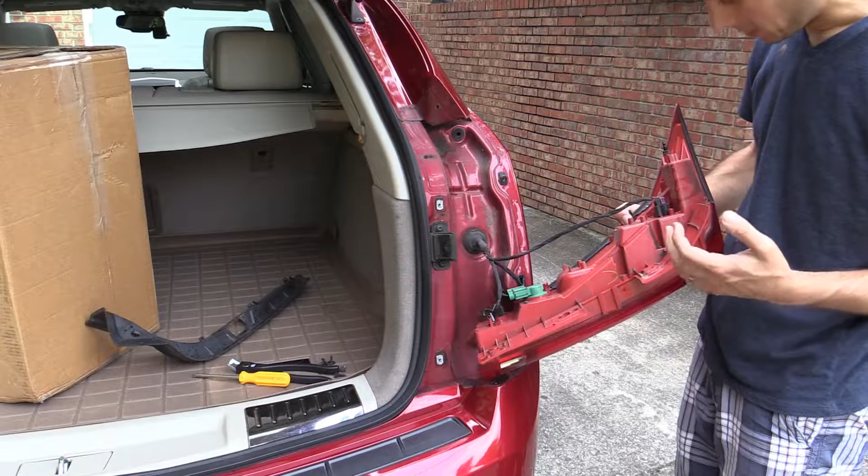So we've got, looks like 3 connections back here. The top one, I believe, is going to be for the brake lights. The brake lights are all LEDs, not really replaceable. Then you've got this big connection here, which is going to be your turn signal, a standard incandescent bulb, as well as one bulb over here for your backup lights, which is also a standard incandescent bulb. Fun fact, it looks like there's 2 bulbs down here in the bottom, but this one over here is fake, so there's just the one.

So let's go ahead and disconnect these. There's a clip there. Oh, that's not good. And that's it. That's pretty much all that's required to remove the tail light.

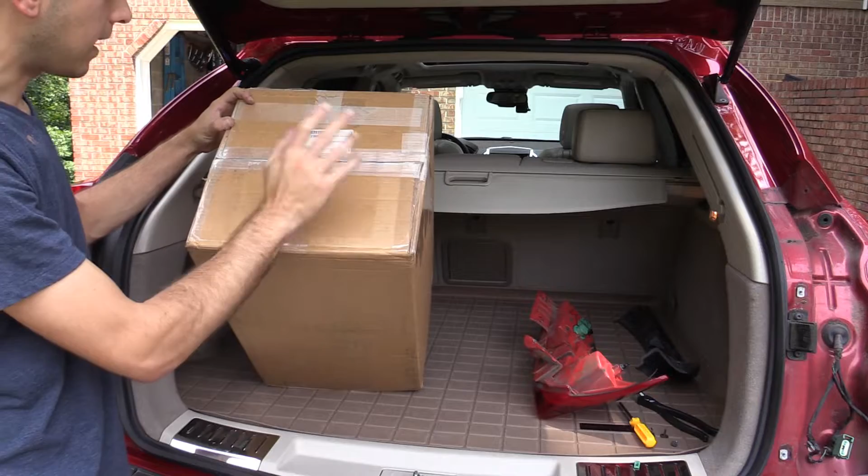So there's what the assembly looks like. Let's unbox one of the replacements. This is the actual GM box that they ship in, and there's the part number there. I'll leave a link in the description below. We've got some paperwork here. There's apparently a little bit of modification that needs to happen to the factory harness to make it fit these lights, so we'll look into that in a moment.

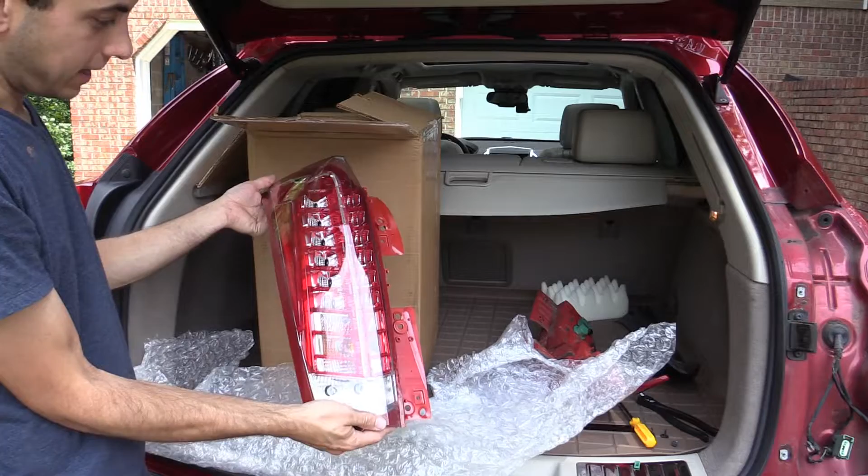These are brand new. And that's what the accessory tail lamps look like. It's really hard to photograph how good these look. These look great in person, in my opinion. I realize it might not be what some people are into, but I really like the look.

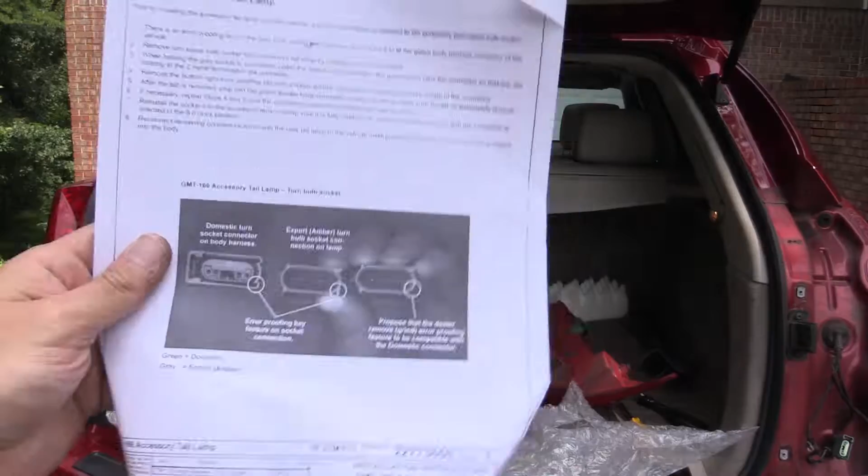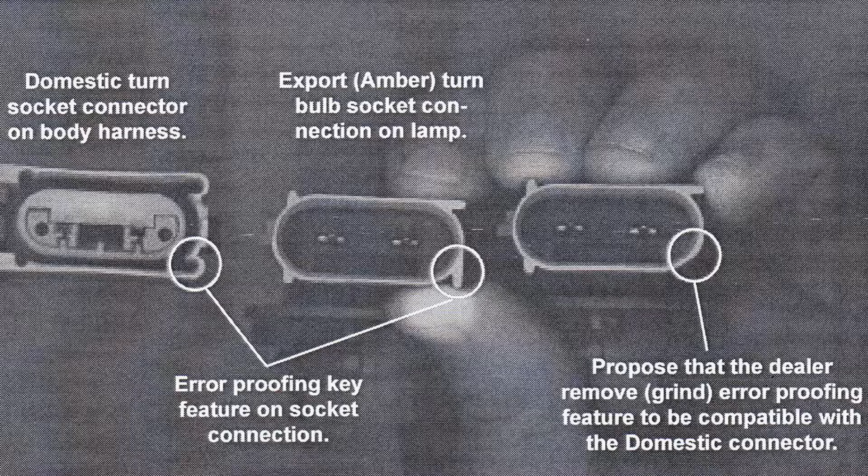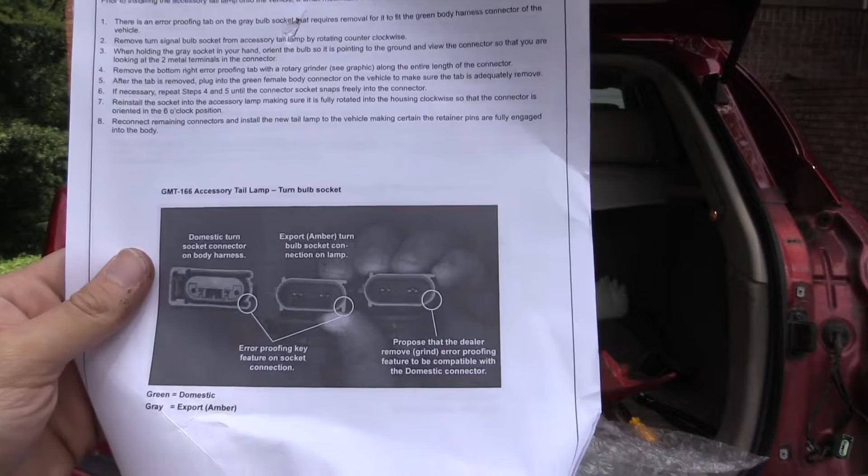But in any case, the only thing that confuses me here is why go to all the trouble to modify this connector? Why not just swap the harness or swap the bulb socket from one to the other? So let's see what's going on here.

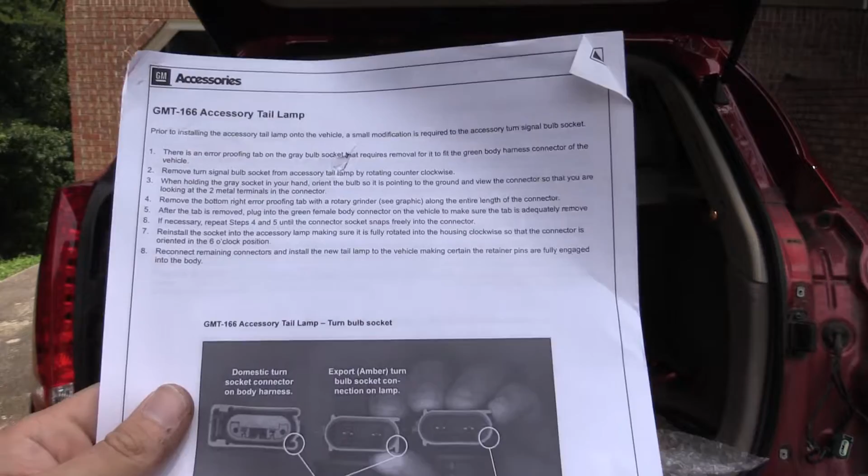So here's the original bulb socket. This just twists out like this. So we'll compare this to the other one and see if we can't just pop this in the other light.

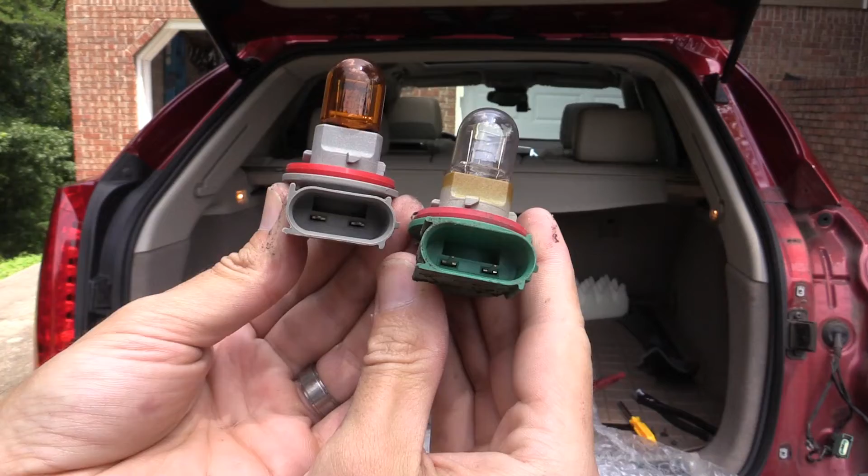Alright, so you can see the differences now. The green one on the right is the one that came with the car, and the gray one on the left is for the accessory tail lamp. And you can see how the plug is molded a little bit different on that one corner.

So what they're proposing is that you literally shave off the little nub here that's different. I just don't understand why we couldn't just swap the bulbs and swap the actual bulb socket here and save ourselves a lot of grief.

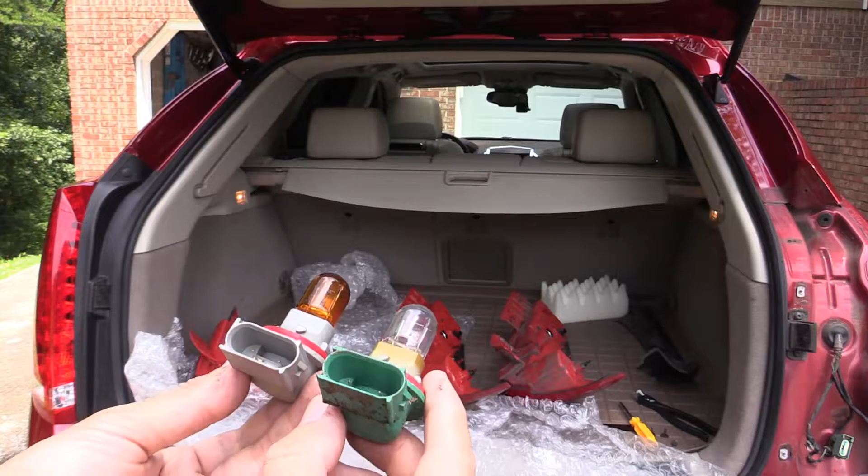So you can't do that actually. If you'll notice on the 6 o'clock position here or thereabouts, this little tab is in a different position. So you actually really do have to modify the plug to fit the factory harness.

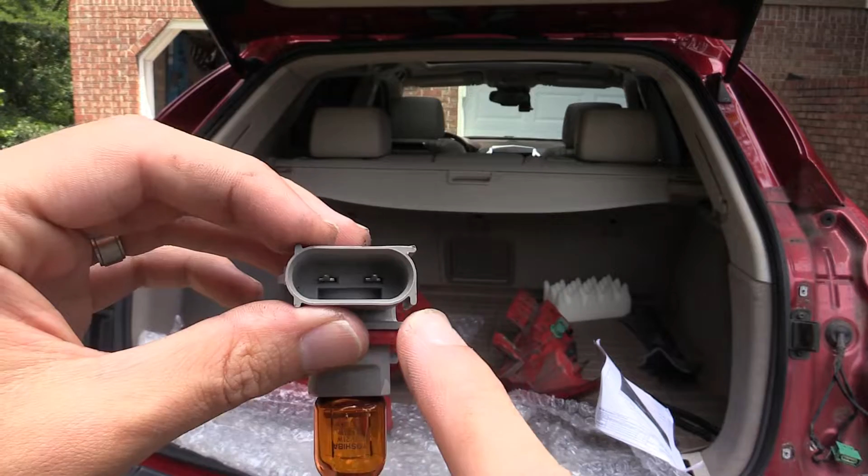So let's tackle that next. Alright, so with the bulb facing down, this bottom right hand groove or tab here is what needs to be removed. And their official instructions are to grind that off.

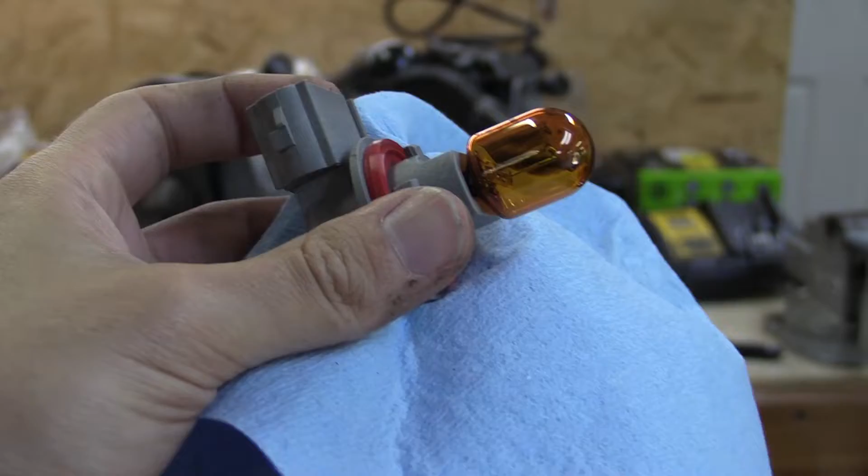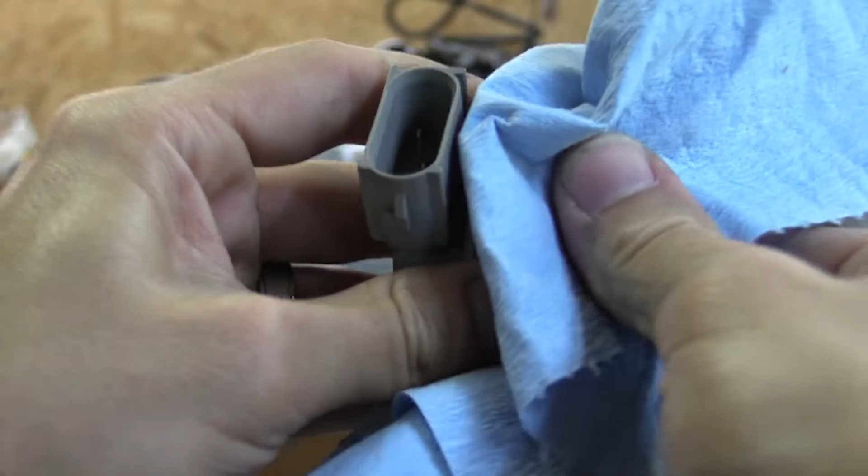So let's grind it off. I'm going to go ahead and remove the bulb so we don't damage it in the process. It's always a good idea to use something like a paper towel so you don't get the oils from your skin on the bulb. That will shorten its life. And there we go.

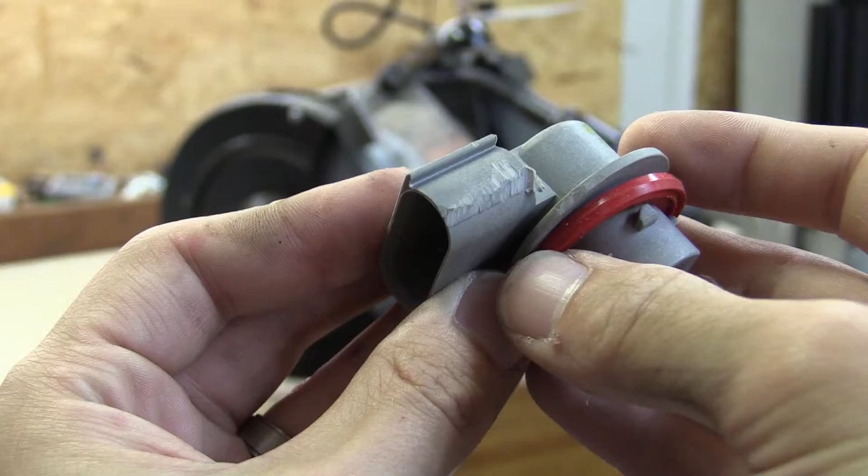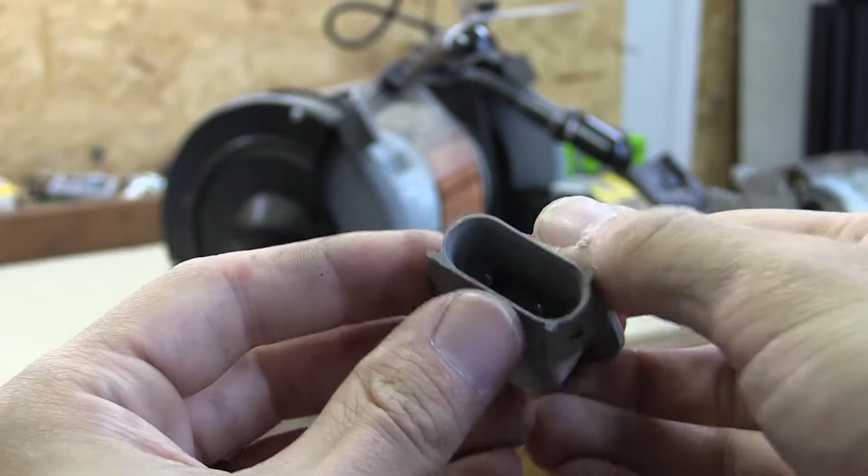Alright, so there's the finished product. We'll see if that's close enough to slide it in the plug. I've got a little bit left down here, but I didn't want to mess up this area. This would have probably been easier with a Dremel, but I left my Dremel at work, so we'll do with a bench grinder. Some wacky instructions right here from GM, but I guess it works.

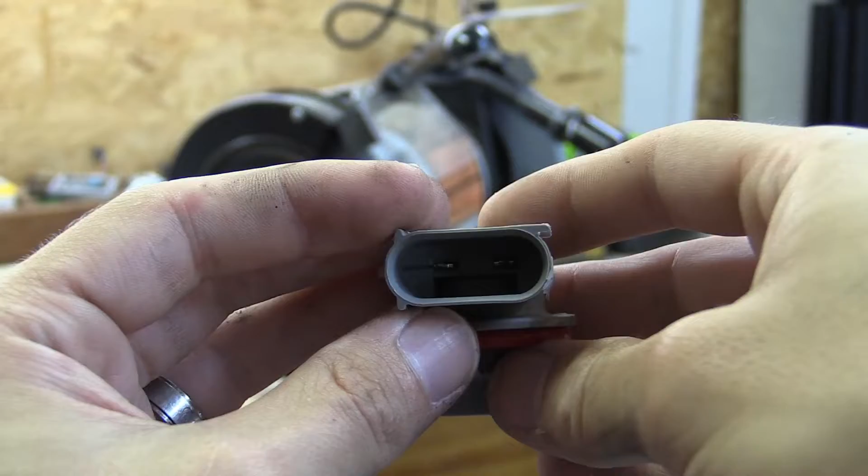Alright, moment of truth. Let's see if this will slide in here. And hey, it does. Pretty cool.

So the only other thing we've got going on now is that this little green tab here broke when I was removing the plug. I guess it's just brittle with age. So I'll probably add a zip tie or something around it just to keep it snug in there.

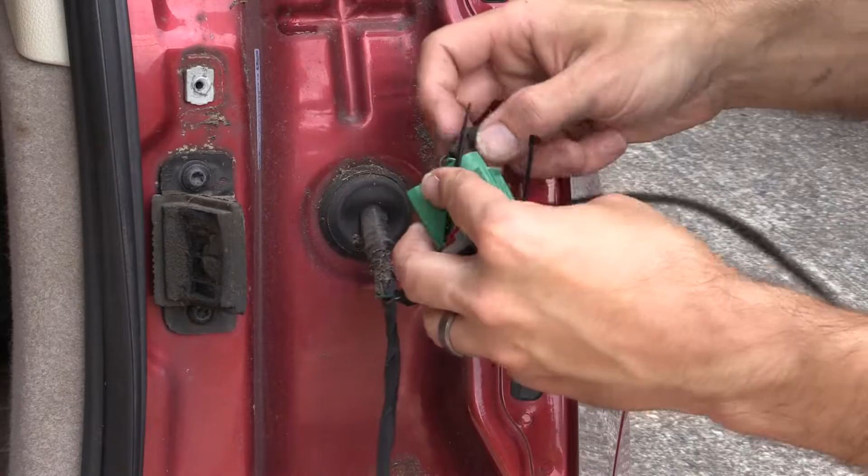So it won't be pretty, but what I'm gonna do is just run a couple zip ties around here to make sure this plug doesn't work its way loose. Shouldn't interfere with anything. Always something. Would be better if I had a bit bigger zip tie, but I don't, so we'll see how that works out.

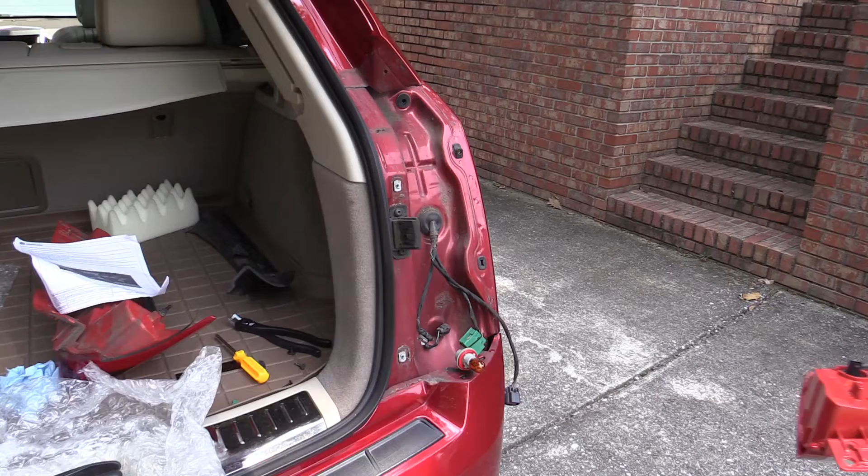Just clip these off, and that ought to keep it snug. So let's get the bulb in there and get everything put back together on this side. Alright, so let's get everything reconnected here. Thankfully none of these other connections need to be modified.

So we've got a couple of these posts here, and they'll line up with the body here and help us properly slide it in place. Push there and it goes right in. I already like the way that looks. Let's get it screwed back together.

Alrighty, we've got one side done, not too shabby. So now we've got a unique opportunity to see both style lamps on the vehicle at the same time. Alright, so the other side should be basically the same exact process.

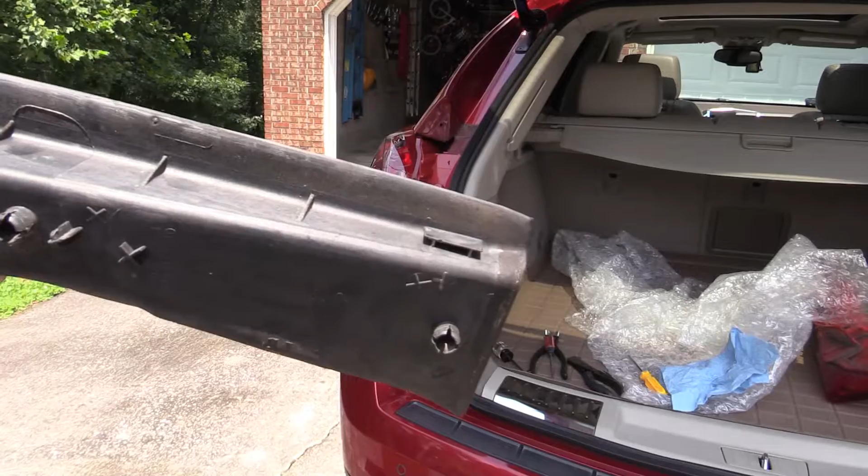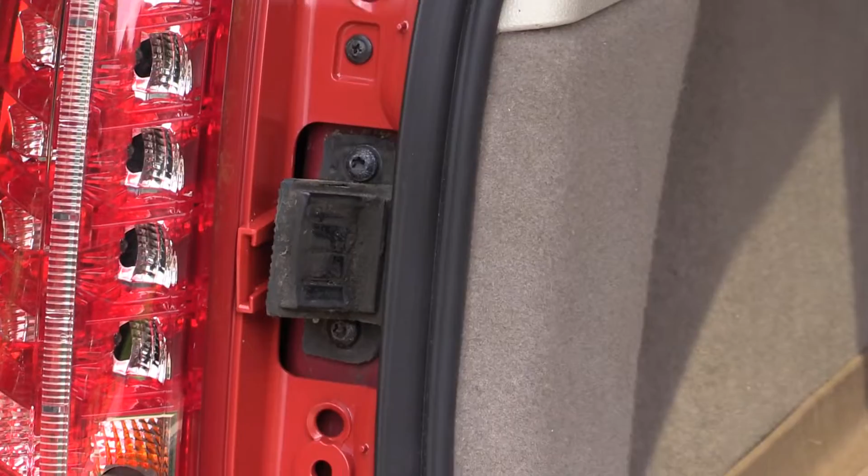One little item I'll point out, there are these little clips, three of them along this cover, and they need to slide into the light right there, there, and down here. So that's the only part that's a little tricky about getting the black cover lined back up.